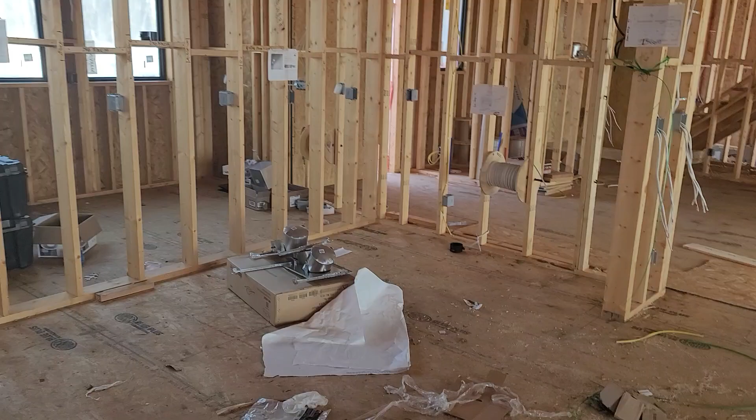Independent client Dewayne-Fraser, Homepro. This is a second measure with frame and a final design. I wanted to go over real quick - this will be one of 5 videos for this second measure. I want to go over everything we're talking about in the kitchen area while I've got it in my head.

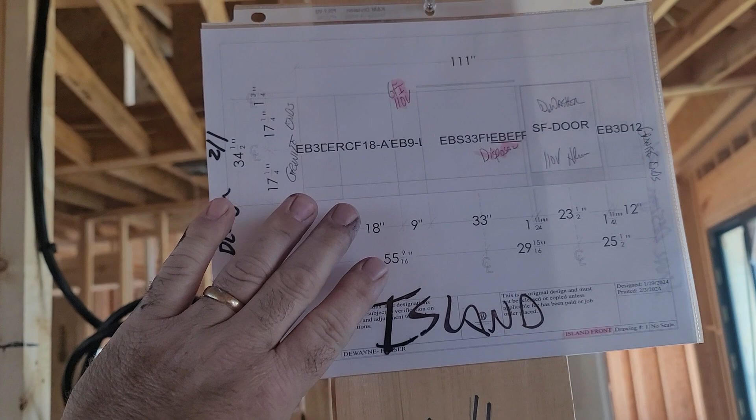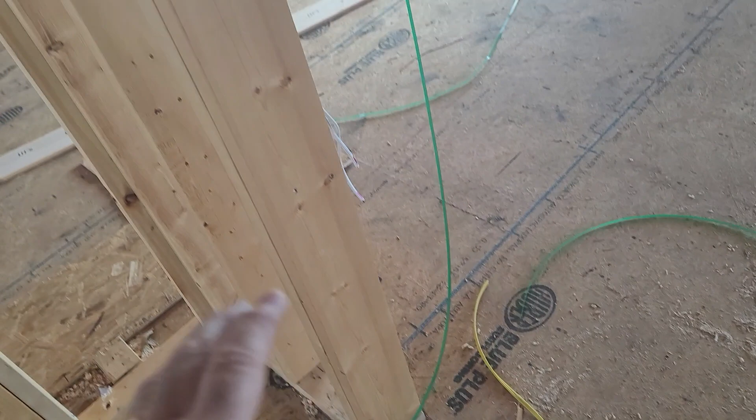First thing to show you, this is the front of the island. Of course it's the island, so it doesn't have a place to hang it up. On the back we have the electrical as well as the cabinet layout for the front. The island is 111 inches. We need to go with a 30 inch depth to this - we had originally thought 29 inches, but another thing came up with the doors of the refrigerator, so we're looking at 30 inches depth.

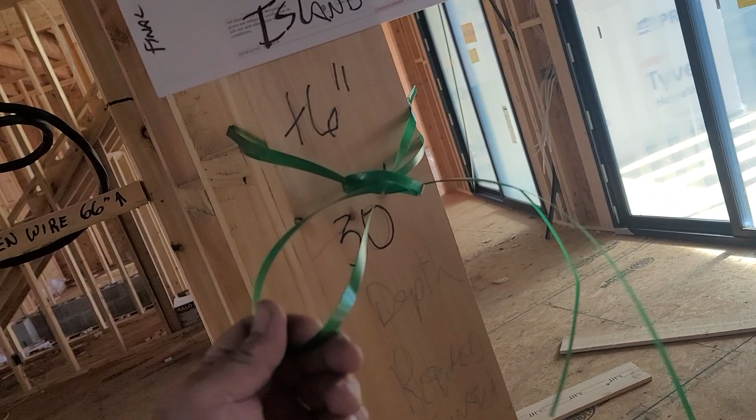So this cabinet will be 24. It'll have a 24 3/4 inch end panel, and about a 1 inch handle hanging out the front of it. So 30 inches is 6 extra inches. I marked it with a piece of tape here - add 6 inches to depth on this one. Here, while we're on this side, take a look at the corner.

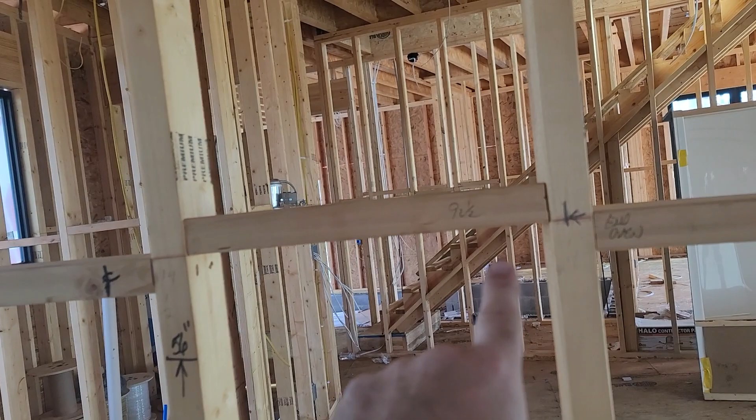92.5 inches is how big the wall is. So I've got to come back and refine this. I had 93.5, which was a frame measurement. We've got to make sure we refine that to 92.5, and there's some room in there to take that out.

On this particular wall, I went ahead and pulled the oven wire back up. The oven for this one has a top-mounted conduit, so having the oven wire come out down low would be in the wrong spot. We need the oven wire here at about 66 inches coming out of the wall.

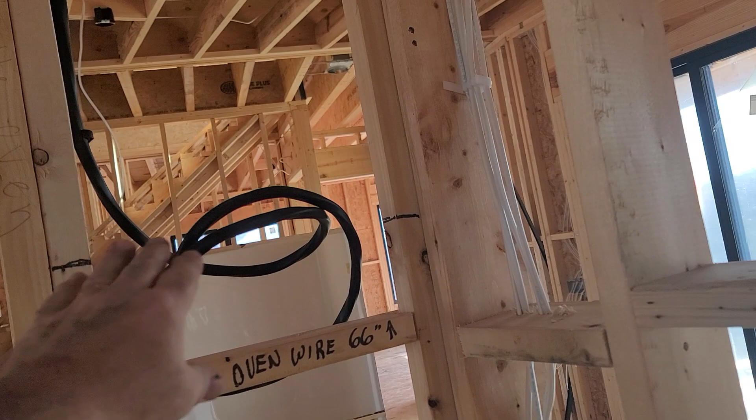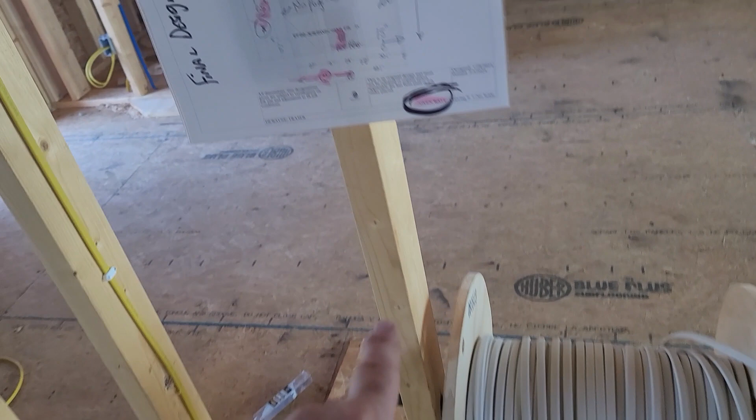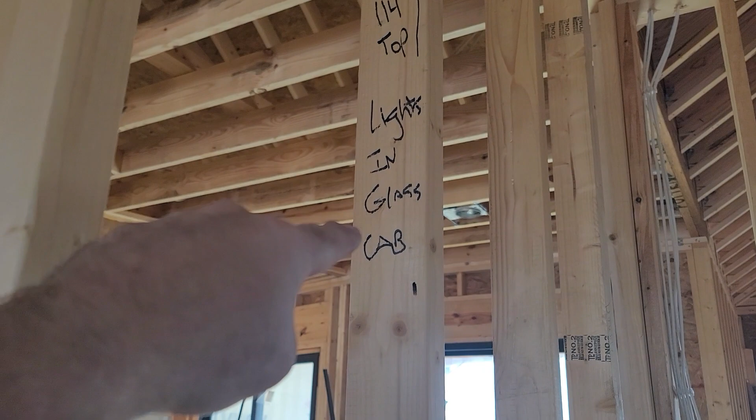On this particular wall, I marked before, there's a bar fridge here. We need an oven and a bar fridge outlet right there, marked on the side. If you look at the drawing, that's 110 volt at 45 inches - that's your beverage refrigerator. Up top you've got glass doors with a switched wire for the lighting in them. On the side of this, 114 inches, lights in glass on the top are switched - we need wires for those.

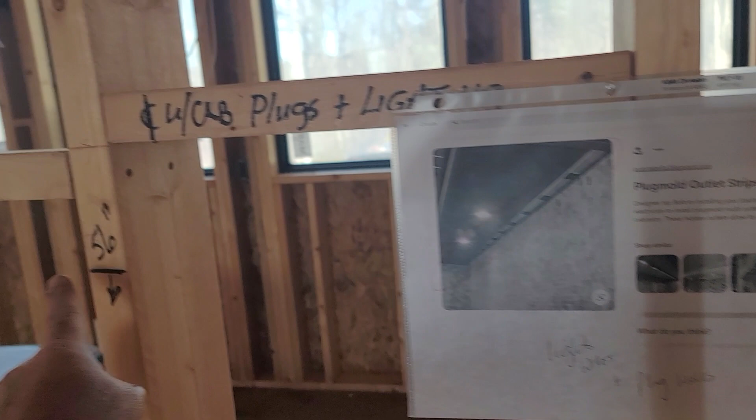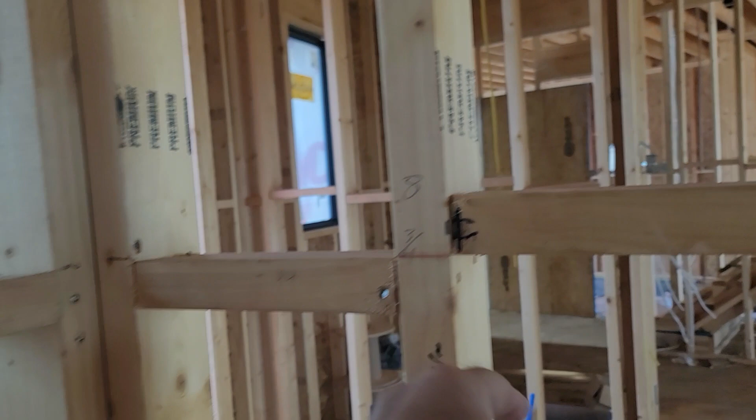Here at 56 inches, 56 here, there, and then there - yes, these are all going to be the outlet strips. The customer wants to use hidden outlet strips underneath. The idea is they don't want any plugs showing in this backsplash, so no plugs - I put that in the note as well. But we are going to have a GFI 110 volt wire at 56 on these center lines - you see here and here, there and there. That's for all the wiring underneath.

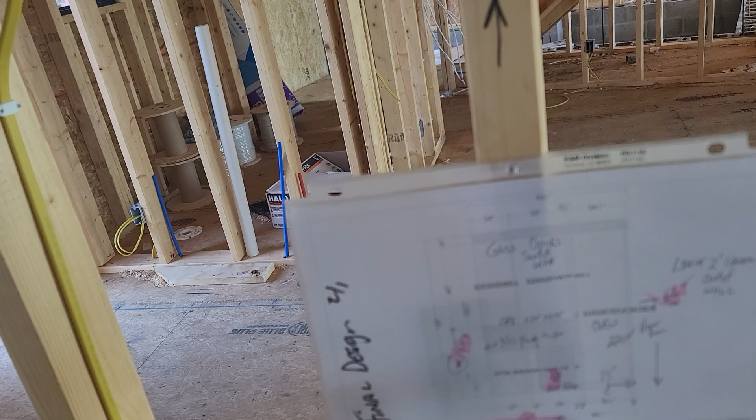Now the cabinets, I ordered them to have a recessed bottom. They'll step up 3/4 of an inch so the light fixture doesn't hang off the bottom of the cabinet - 3/4 inch recess. Each one of these center lines is the center of that cabinet, which is what I'm showing. The corner cabinet I showed twice - here and there. It'll only have one electrical plug strip in it, but you should talk to your electrician about how you want to run those wires - it may just need one for that.

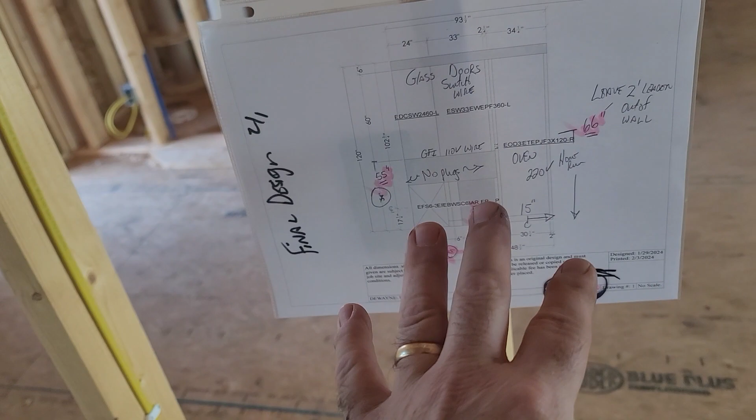So everything else here, I believe we're in good shape. Let's go to this wall - this is the cooktop wall in the kitchen. First thing we did not have before was the center line of the cooktop. I have that now - if you look at the drawing, 128.5 is the center line of our cooktop. That's 220 volt - check your amperage rating for that one.

Here in the overhead, the upper cabinets are 84 inches long. We have glass lights and LEDs in the tops, so 57, 27, and 12 is the same center line as the plug lines on the bottom, but we do need wiring for the glass lights up there. 110 volt range hood wire marked right here - we're going to have a 110 volt range hood.

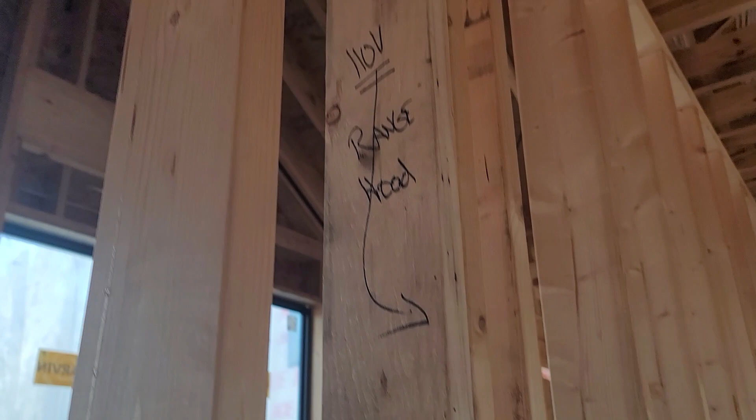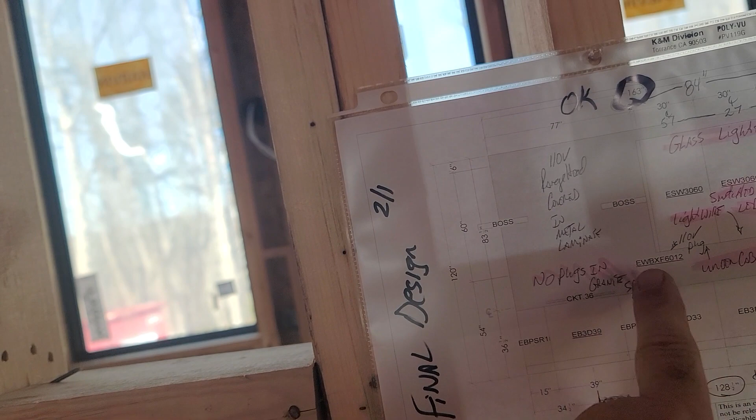It's probably going to be a custom built hood covered in metal, the same metal accent as the rest of the room, so we're probably going to be building that hood. No plugs in the granite backsplash - they want this to all be granite backsplash without any plugs in it. We do have a hanging build-on-site shelf - we have a hanging here and a hanging shelf there.

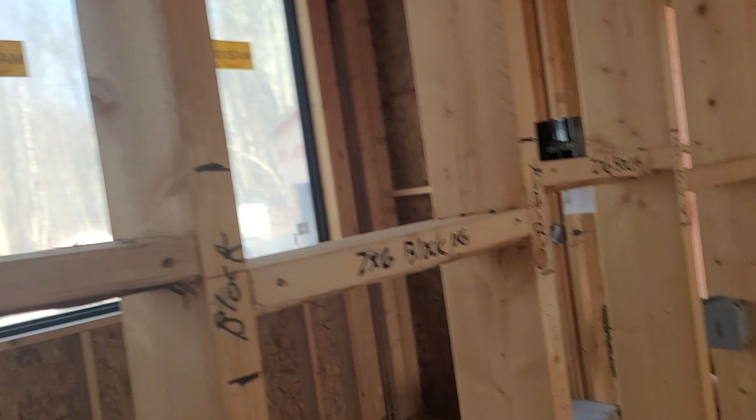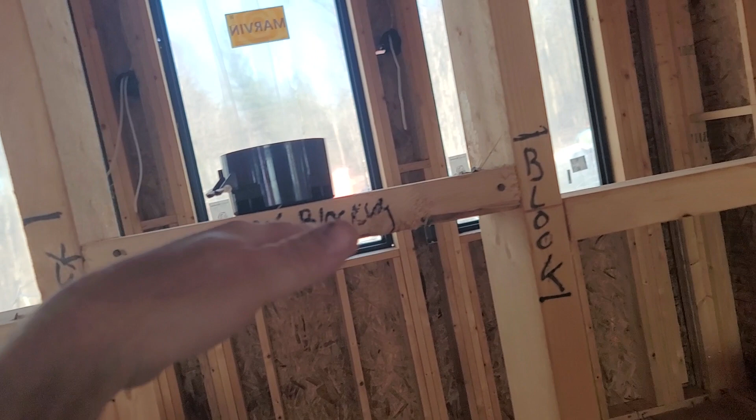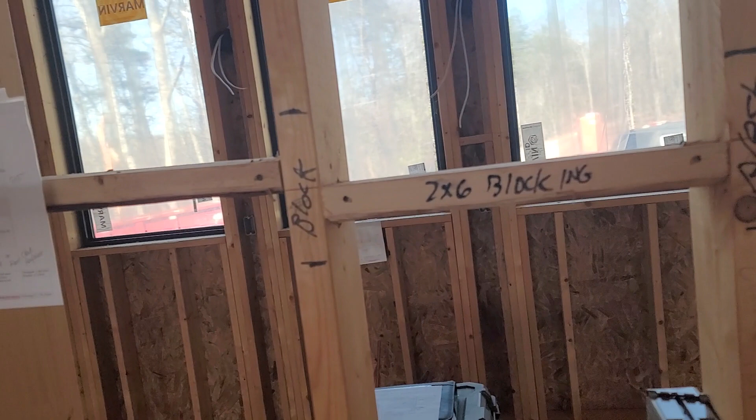So you'll notice I've got blocking marked off on all of these. This is 2x6 blocking, but I need it in this direction, sideways instead of flat. I need that where when we go to hang these shelves, I can put my cleat, do my cross matching, and have plenty of support behind where we're hanging these. This is a column, a 2-inch column, and we'll be tying that shelf to it, but still need the blocking. Same thing on the left, got blocking.

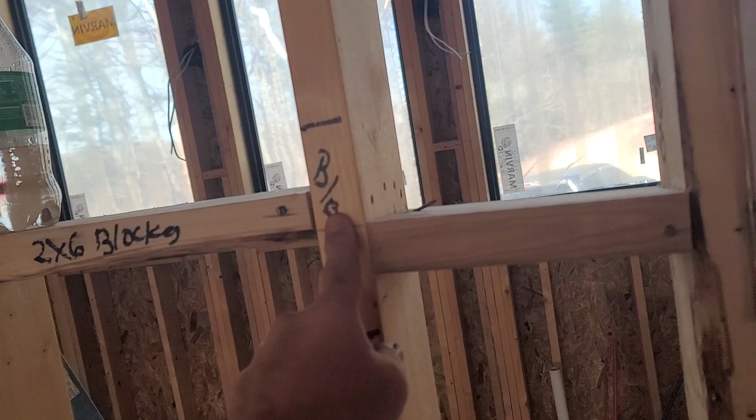This was at center line around 62 inches or so. Come over here on this side, let's talk about this side. This is the pantry interior wall.

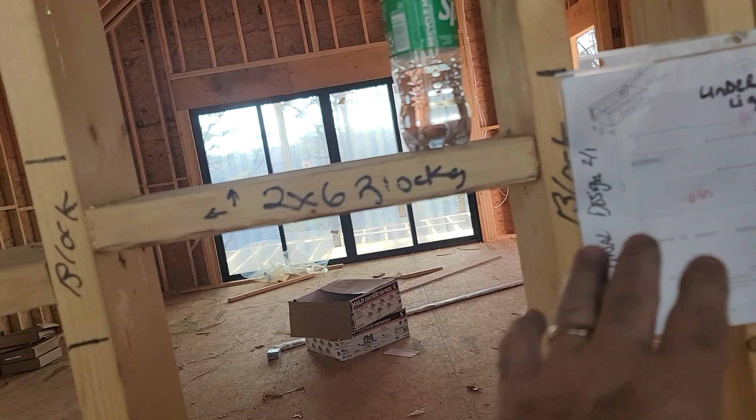On this one, we're going to be omitting this box. I put a little piece of styrofoam in it. This box is okay, that box is okay. We need to add another box here where I've got it wrote on the stud. And then here again, I've got the shelving. There's going to be one shelf here. That shelf is at 82 to the top of the shelf, and this shelf is 62 to the top of the shelf. She wanted 20 inches between each of these items.

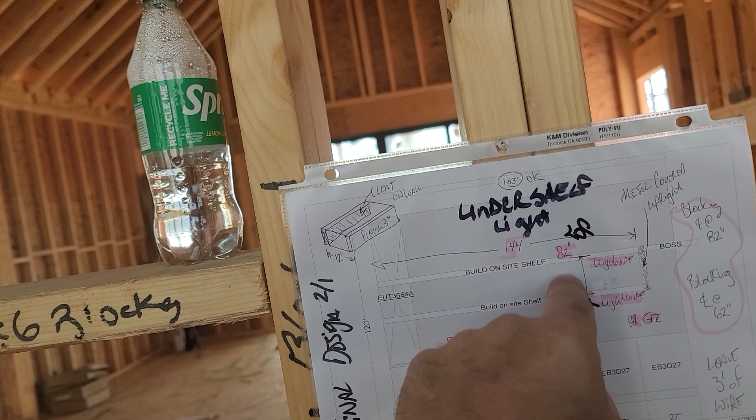So when we look at blocking, again, 2x6 blocking here, I'll need that all the way down. I've got it marked between each one. Sideways blocking here, frame blocking, 2x6, and up here, same thing, 2x6 blocking, solid. Again, we've got to build a cleat and a hanging shelf, and I have to have solid blocking behind that for it to work.

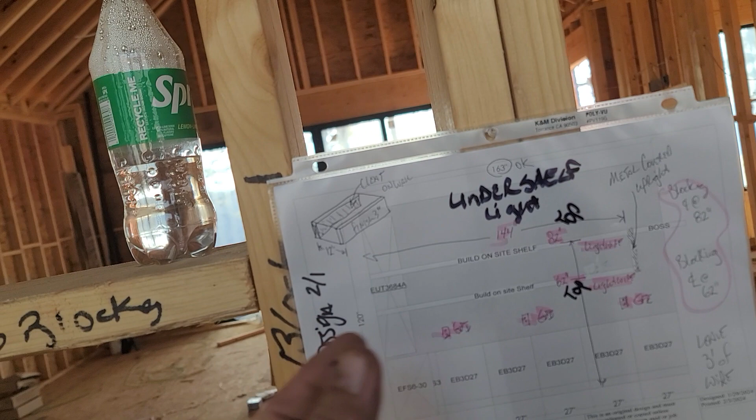One other thing too is these shelves will actually have a dado cut in the bottom of them for a light to go into them. That's an undershelf light, so each one is going to have a wire pulled for the light to go inside. If you look here at 62 inches, we need a wire for a light, and up here at 82 inches, we need a wire for a light.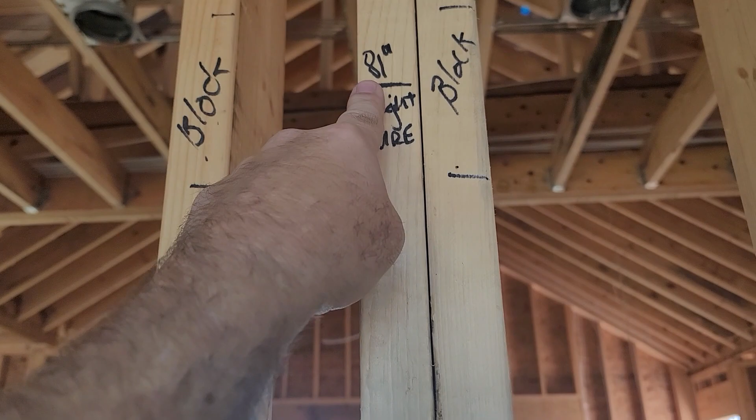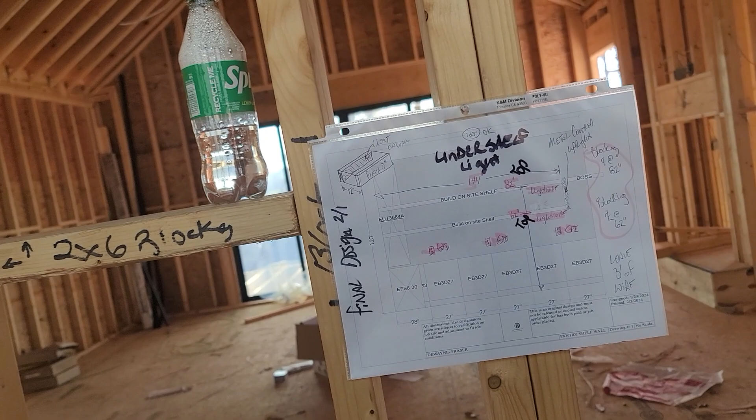Now if you want to do that in several places, you could do the same thing maybe at this end at 62 inches here and at 81 inches there. That way we have the light wires in two different places, maybe that would be easier. Again, we've got to get with the designer for the cabinets and actually speak with Arlene about what light fixture she wants to use underneath these shelves.

This upright piece is a metal covered upright piece. It's going to match the hood, and it's going to match some of the other places, we'll go over those in a minute. But as far as that goes, this was the biggest thing: leave 3 feet of wire hanging for any of these light wires coming out, and they need to be 14 gauge wires because they're just running LEDs.

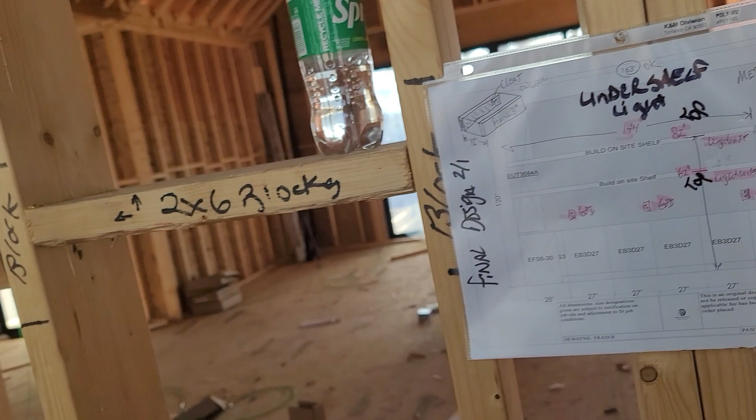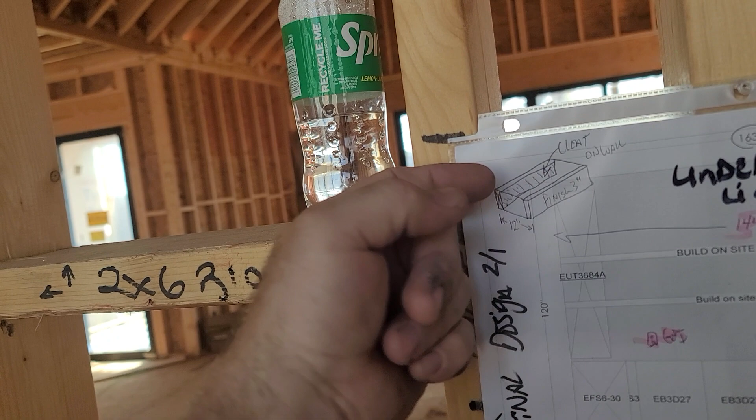This is how we're planning on building the cleat on the finish. The finish will be a 3-inch flush, then they'll have the top and bottom at a net 12. Then we cleat it on the wall, and we'll have arms that come out and actually set that piece over the top of it, so plenty of room to run wires inside of that box.

Here's the pantry back wall. This particular back wall is 97.5. I need to go back and double check that too, I had 98.5, which was frame, so 97.5.

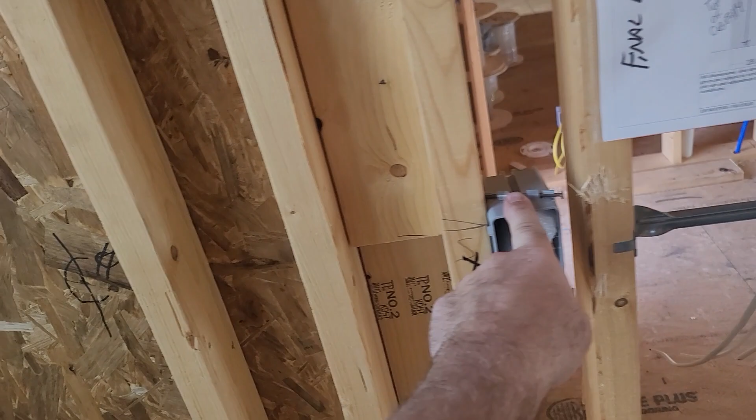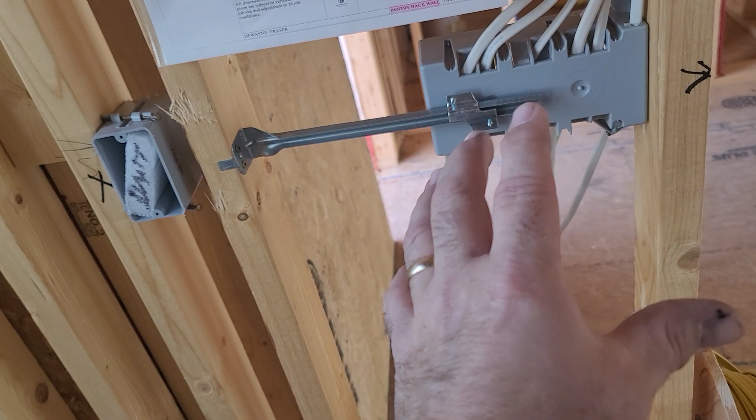As far as measurements go, this will be omitted, that's omitted, that one's omitted. We're going to get rid of all the boxes. Here we need a box blocked out to that measurement, which is 31 inches from the left. And we need another box at 67 inches from the left-hand side, and it's got to be real close. I think it's right here, yeah, right here, need a box on this side.

You can't because of the switches here, but you'll have to have it on this side of the stud for that same one, 67 inches.

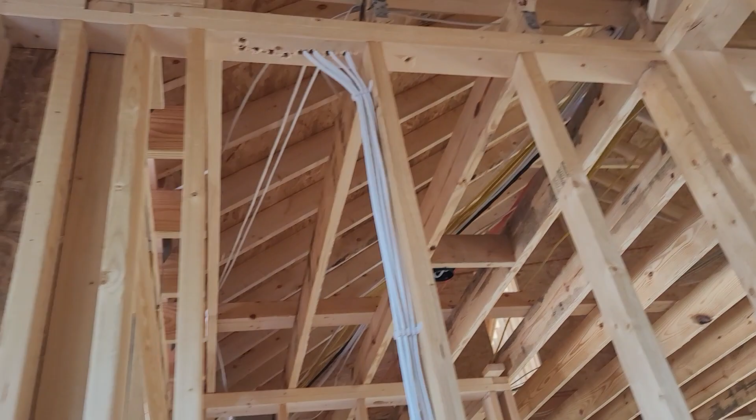Top of these cabinets on all these are top alignment 114 inches. Again, we have the glass openings up here and light wires, so confirm what type of fixture that's going to be for that. But they do have 14 gauge wires we need at 114. I think I put a note here, 114 glass wires.

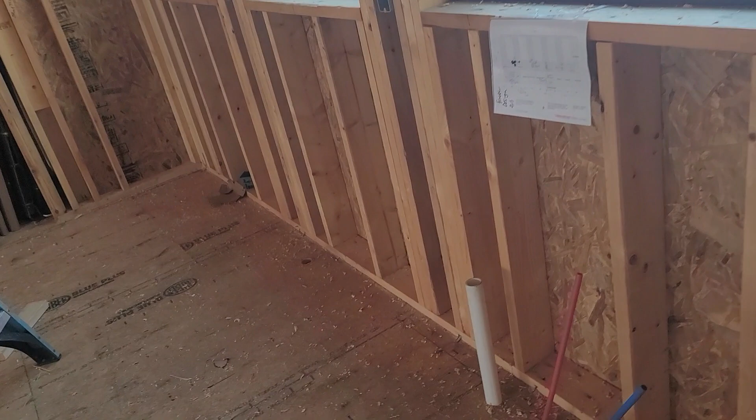Now over here on this one, you've got your outlets in between the windows, that's perfect, there's no problem there. The water lines and stuff are perfect, no problem. Dishwasher is going to be to the right hand side.

Take a look at some notes here. Basically, this is going to have a solid metal piece in the back of this, again an accent color piece that's being put in. This is getting a disposal for this one.

Every sink in the house that's a major sink, kitchenette sink, whatever, will have a disposal in it. And then as far as that goes, the wiring stuff should be just normal here.

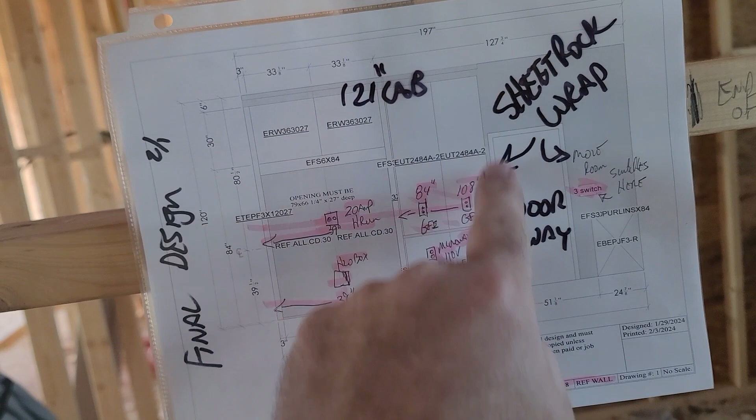One of the things that's a major change is the refrigerator wall, let's take a look at it. On the refrigerator wall, you have 121 inches worth of cabinets. Literally with the trim, the size of the opening, and the amount of space we have for the door to open and close, plus the fact they want these to be double doors to match the other double doors in the pantry, we end up with 121 inches worth of cabinets. They come to right there, okay?

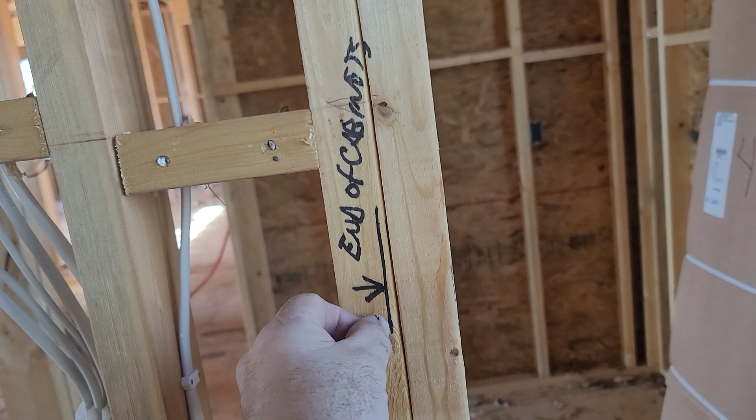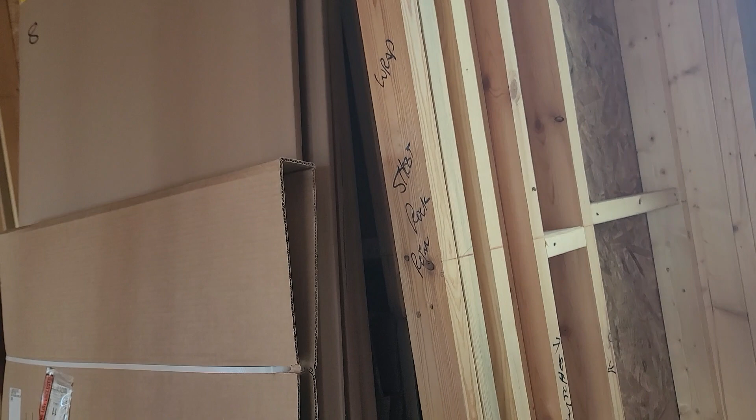So this is going to actually be a doorway with a sheetrock return or a wrap on it. When we put our cabinets in, you'll have about a 1-inch overhang of your countertop. You'll be really close to being right up to the end with the cabinet countertops. But again, this is a sheetrock wrapped doorway, it is not going to have a door in it that swings in or out. It's just going to be a wrap so we can have our cabinets come 121 inches from the left.

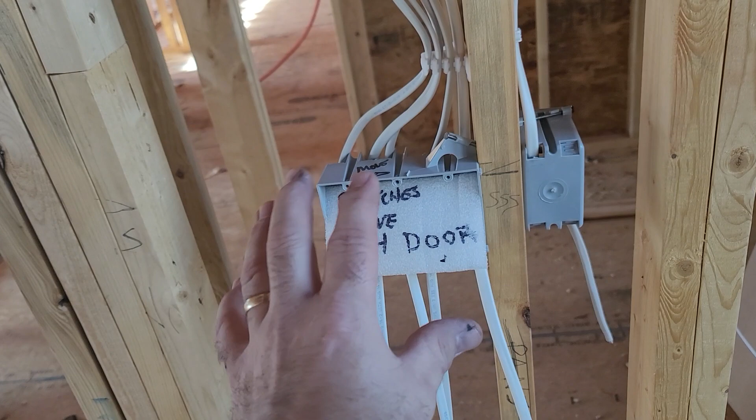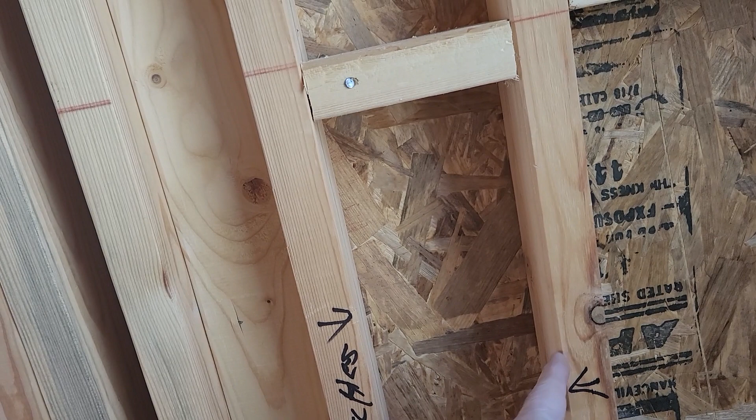That means the switches that are here are going to have to move to the right-hand side of the door. All of the wiring is already done for them, but it should be easy to move those. This here is only 5 inches wide, and the standard box over there is 6. I talked to the customer and he said he'd be okay with above and below switches if they had to do two different ones instead of it being a 3-wide box like this.

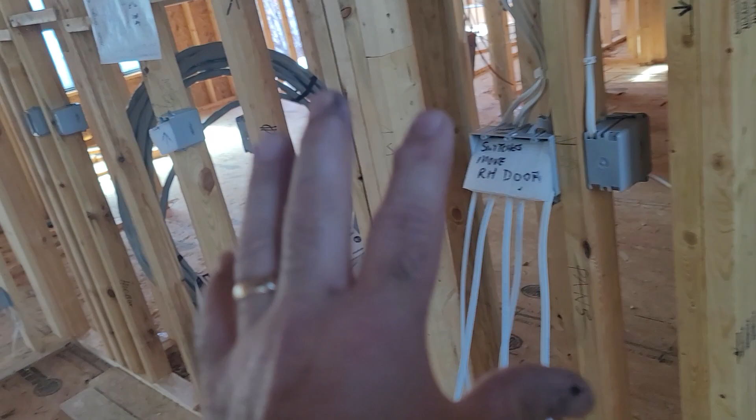Putting a quad box here, so you could actually have a set of switches above and a set of switches below if you had to, to get it to fit in that opening. But that pantry area here is part of the look they're wanting, it has some bifold doors on it, so these are definitely going to be in the way for that to work. So let's talk about this refrigerator.

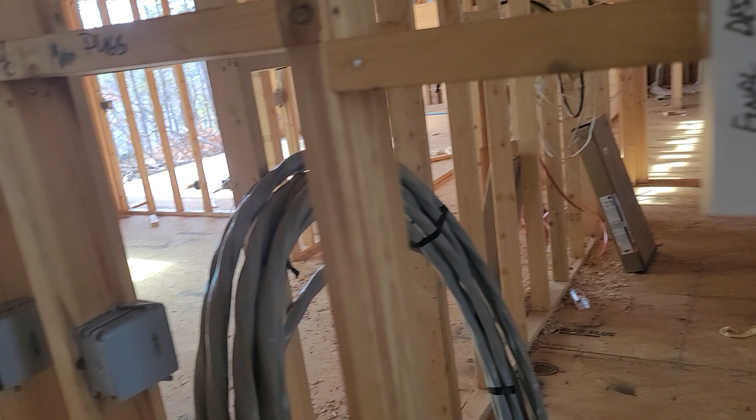Basically, this particular outlet here is going to have to be omitted. We do have 2 other outlets that need to be in place, 84 inches from the left and 108 from the left. GFI is there, 84 from the left for a 110 volt microwave. That one needs to be here. I went ahead and put it on the side, 28 inches off the floor.

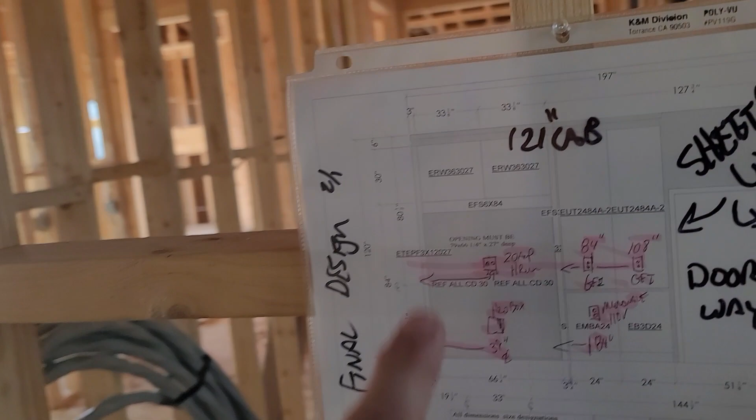And then here, this is where the electrical is going to be for inside the pantry. There's another one that's going to have to be right here inside the pantry, so this will be blocked over to make that outlet fit there. Again, 121 inches worth of cabinet, sheetrock wrap on a doorway, and 3-way switches moved to the right-hand side.

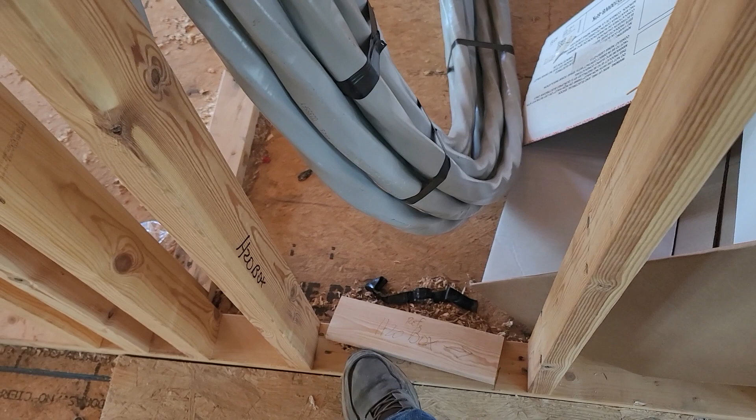Then on this left-hand wall, your water box needs to be at 39 inches. So if you look here, the water box needs to go right here. It looks like they had actually started drilling for that, so I think we're in good shape there.

But then this is your plugs for your actual refrigerator and freezer. They can be in 2 separate places if you want, but this is too close to the end. It either needs to be moved here or moved to this side of this plug so we won't have any problems being able to plug them up. The actual drawing from the factory shows this in a single quad box with 2 20-amp single plug-ins in it, but it doesn't have to be that way. It can be 2 separate circuits if you'd like.

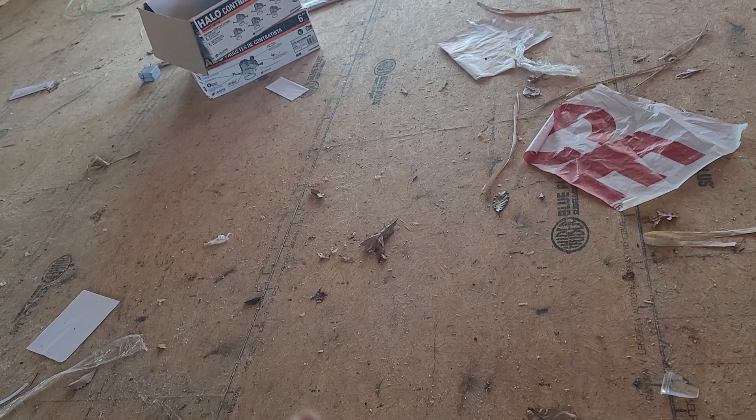Go back to the island again, this spacing. With a 111-inch island, you actually have 43 inches of walk space, 42 or so here, 43, 42 on that side. So it's perfectly centered. They wanted to make sure the cooktop here is centered on the look of those doors over there and centered on the island with the sink. It is definitely centered, maybe a quarter inch difference, but in the room it will be centered.

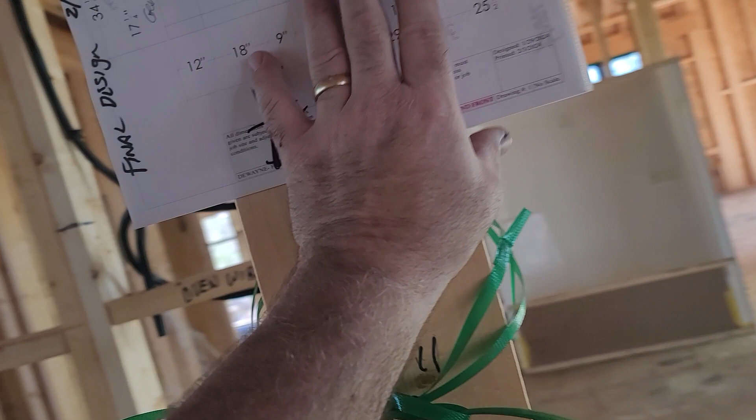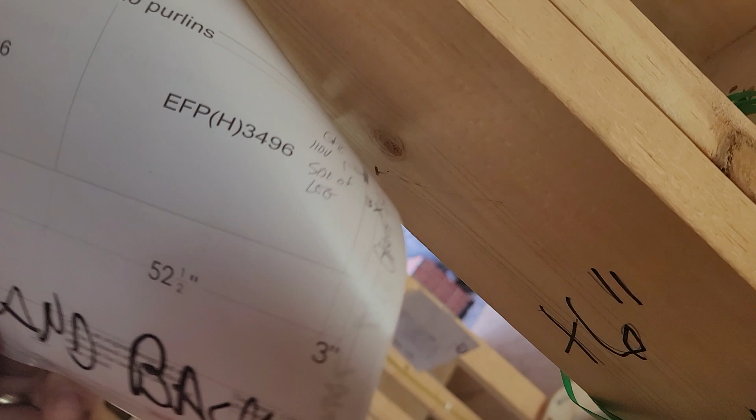The only other thing about the island is the back side. If you take a look on the back, there's going to be legs on the left and right-hand side. That's the alternative spot for the 110 volts, because this will have metal, a metal piece across the back of the island, and there'll be legs with electrical that goes in there.

All right, this is the kitchen pantry area. If you have any questions...